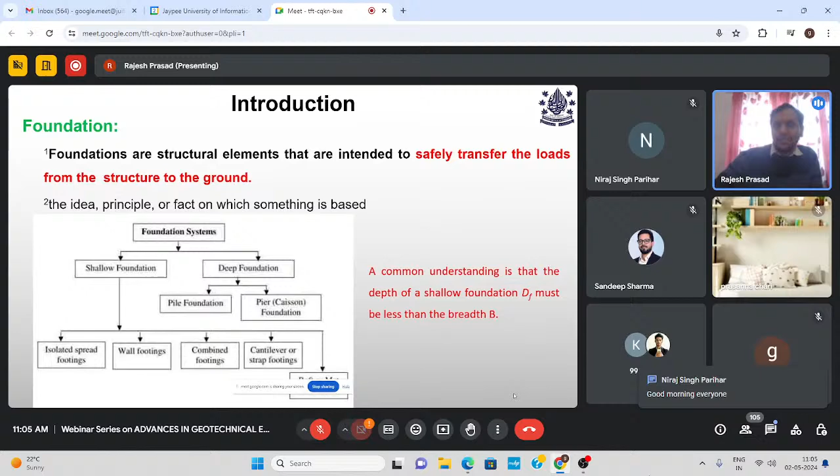So let us see—we already know what a foundation is. Basically, foundations are designed to safely transfer the load of the superstructure to the ground, and foundations can be classified into shallow and deep foundation. It is generally understood that if the depth of foundation is less than the breadth of footing, we can say it's a shallow foundation, and if the depth is more than the breadth, it's a deep foundation. But this is common understanding, not the real definition—just the initial thought process when dividing foundations based on whether they are deep or shallow.

So what is the purpose? As I see, it is basically to transfer the load safely to the ground. First, without failure of the soil, without compromising the safety of soil or without the shear failure. Then the settlement of the foundations should not exceed the permissible settlements, and there should not be excessive settlement. So the second criteria, that is the settlement, is just called the serviceability criteria. And the first criteria is called the bearing capacity criteria, where we don't allow soil to fail in shear.

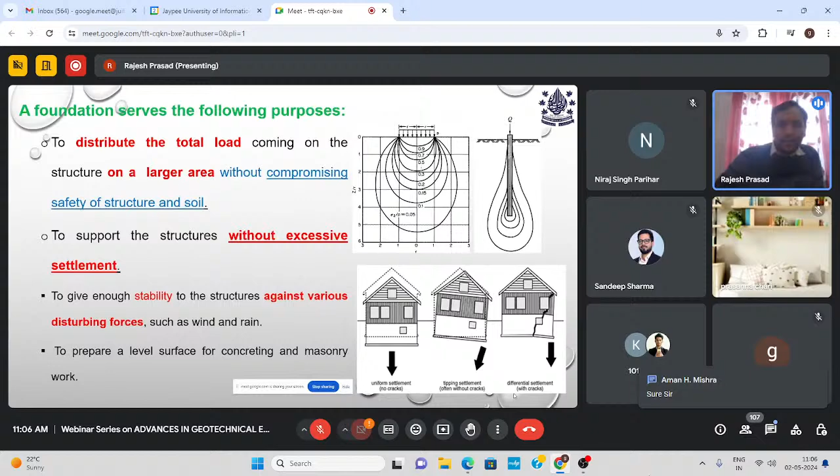Sometimes the settlement also poses problems under sloping conditions. Suppose if the ground is sloping or earthquake loadings are there. So it is very common, even in normal conditions, to have either tilt or differential settlement. It is very difficult to have uniform settlement. So this is the disadvantage of slopes or seismic loading conditions.

So sometimes what happens is we design our superstructure very strong, and foundations also very strong, but the problem might be the soil failing. So even after designing a very good, very strong foundation and a strong superstructure, they are really failing.

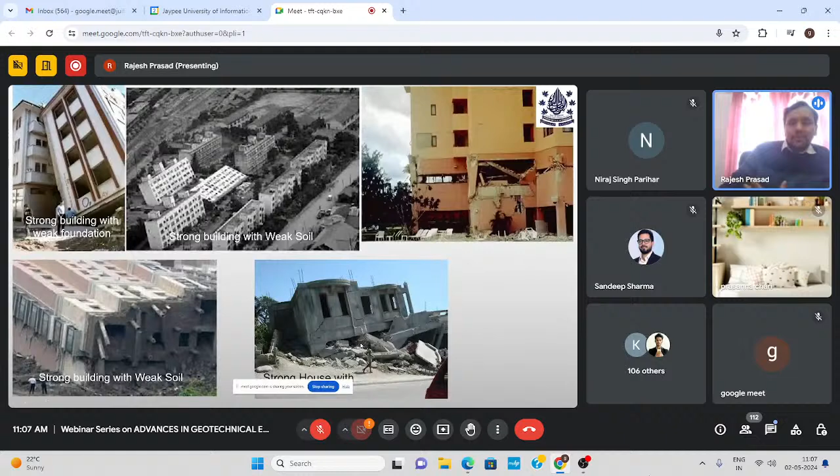Here we can see the superstructure itself is very strong. Here pile foundations are tilted a little bit, you can see, but almost all our piles are intact. So we can say here we have strong buildings with strong foundations but bad soil. Here we can see the building is almost intact, because the foundation was big. So these are the conditions we have to take care of in real scenarios.

So as we discuss deep and shallow foundations, the real criteria is the failure criteria. We can classify any foundation, whether it is deep or shallow, just based on their failure criteria, not generally based on the depth of the foundation.

So if we see in shallow foundations, generally we can see punching, or mostly we can see general shear failure. Generally what happens when we apply loading on the foundation is first there will be a little bit of elastic deformation. If we remove the load, it again regains its original position or shape. After the elastic deformation, we have local cracking from the sides, because this footing is almost, you can say, a rectangular footing or strip footing.

So there will be concentration of stresses at the corners. When there is concentration of stresses at the corners, we have local cracking around the footing or around the corners. Then we have wedge formation, and finally development of the rupture. So this is the development of the failure modes, how it has developed.

And similarly, if we see in the load settlement curve, the same things will be reflected here also. The initial portion is a straight line, stress is proportional to strain, almost - I can say this is the elastic region. Then we have the transition state, where the plastic zone is developing, and then again we get a linear portion, where again the slope is constant. So this is again the plastic region. This is generally the type of failure we see in this case.

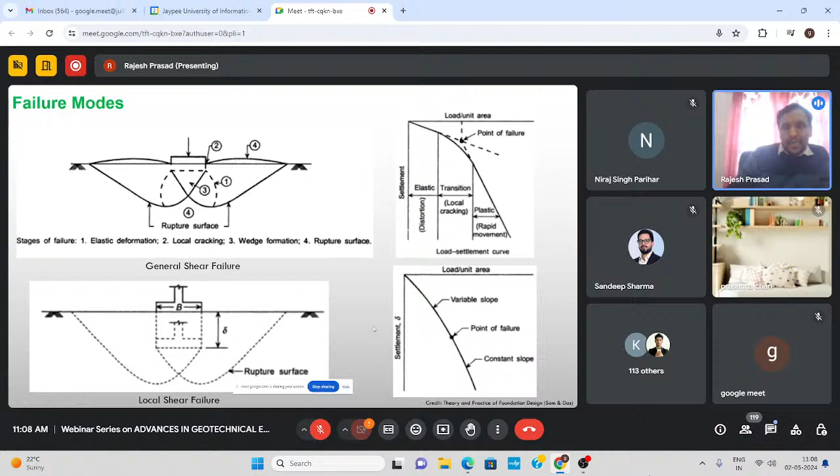If your soil is strong, we can see general shear failure in the shallow foundation. Sometimes our soils are not very good, then we can have local shearing also. So now, if foundations are very deep, we look at this df by b prime plot versus relative density. We can see here if density is high, generally our depth is less, the d by b ratio is less than 3, and we see general shear failure.

Similarly, when relative density reduces, and for the same depth or little more depth, we have local shear failure here. But for punching, when the d by b ratio - where b prime is nothing but 2bl divided by b plus l - gets more than about 5 or 6, we generally see punching shear failure. Then the behavior of the foundation becomes independent of the relative density.

What we can see here is that the failure pattern is independent of the relative density of the material. It is always going to be the punching shear failure.

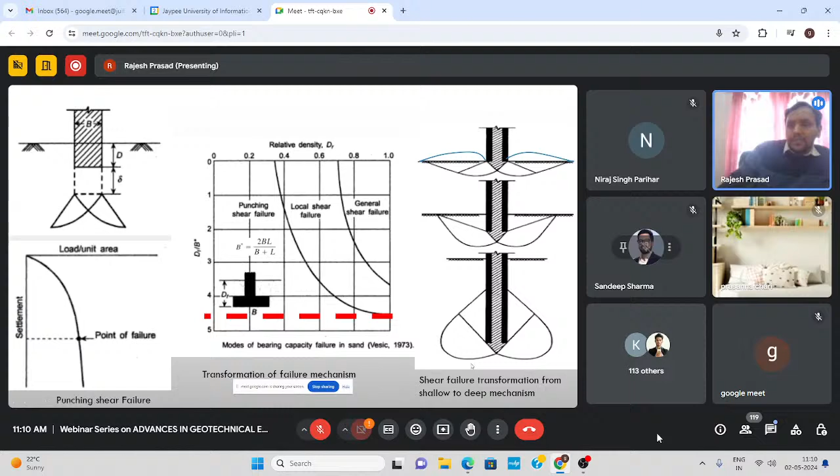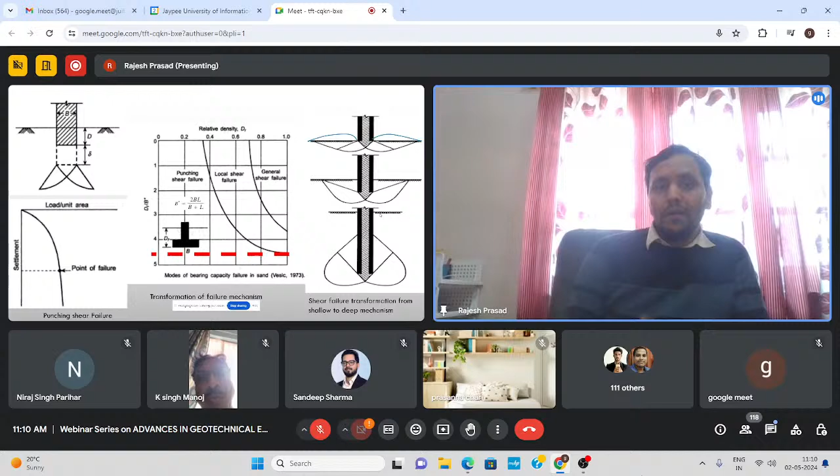So this is the transformation of the failure mechanism as we go from shallow to deep. When it is a shallow foundation, we see general or local shear failure. When the D by B ratio is more than 5 or 6, we see either punching or very confined failure. At the intermediate level, we have confined failure also, when the failure surface doesn't reach the ground surface. So on this basis, we have to classify the foundation as shallow or deep, not based on the D by B ratio.

Now, as the topic of the presentation is foundation on slopes. When we ask students this question, even after BTech, even after MTech, or when they are appearing for their PhD interview, some students have worked on foundations in their master thesis.

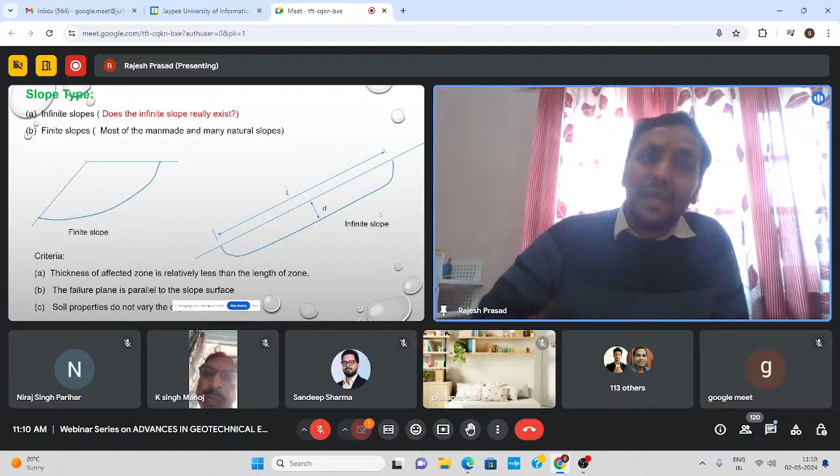When you ask what is the difference between infinite slope and finite slope, they hardly able to answer this question. Generally we think that infinite slope is any slope that has infinite length, infinite extent. But if something is infinite, we never see any slope that is truly infinite. They don't exist, at least not on earth. Similarly, finite slope - most of the time we see man-made slopes like embankments or dams, or many natural slopes are also finite slopes. So how can we classify slopes as infinite or finite?

Most students don't know what an infinite slope is, even after getting their degrees. So what are the different criteria to define a slope as infinite? First, the thickness of the affected zone is relatively less than the length of the zone. If we say this is the affected area where landslide occurs, there is a chance of a failure surface developing there. If we zoom out on the failure surface, we see the length of the affected zone and the depth of the affected zone. If this D by L ratio is less than 0.1, then we can say this is an infinite slope. This is one criteria.

The second criteria is that the failure plane is always going to be parallel to the slope. In case of an infinite slope, generally they have the failure surface parallel to the slope surface. So this failure surface is almost parallel to the slope surface - this is the second criteria.

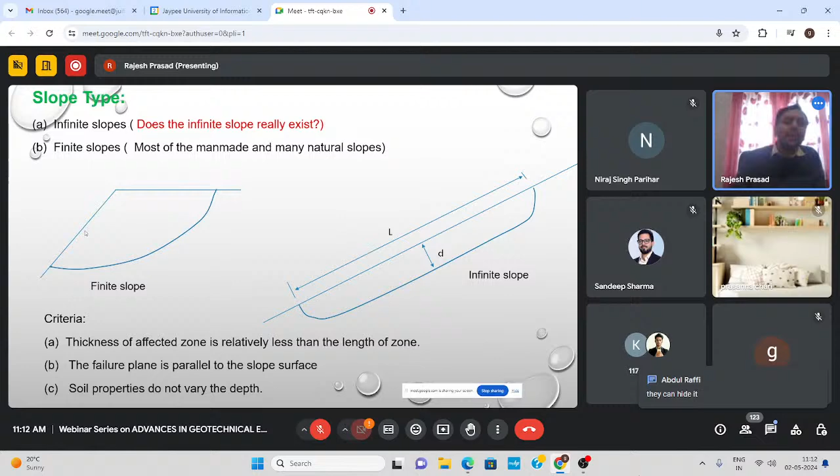The third criteria is that soil property doesn't vary with depth. So up to a certain depth, this soil property remains the same here, here, and here. Another issue is that the variation of vertical stresses should not vary with depth generally. So these are the criteria needed to be satisfied for an infinite slope. If these criteria are not satisfied, then the slope is a finite slope, and here the soil properties might be varying with depth also. So this is the basic difference between finite slope and infinite slope.

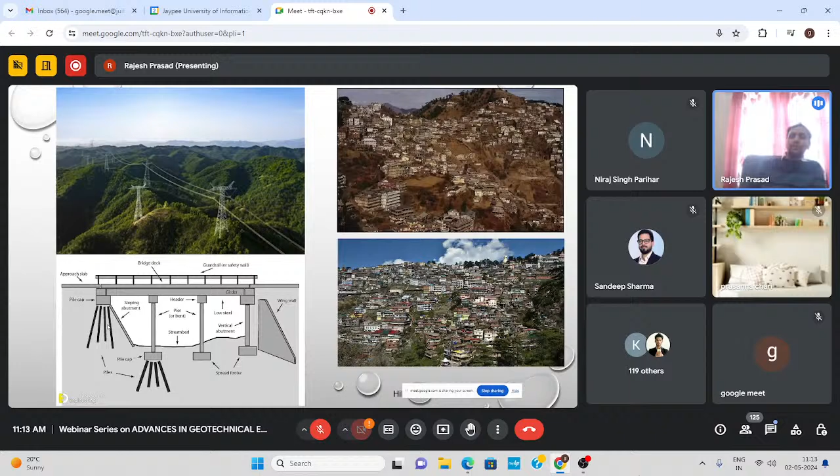So therefore we need to design, or we need to determine the bearing capacity of foundation on the slopes.

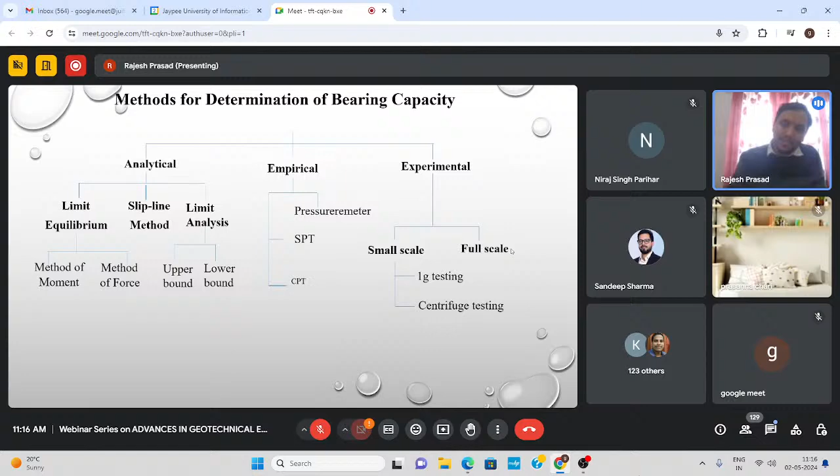Small scale can be classified into 1G testing or centrifuge testing, or full scale. Generally, we never perform full scale testing. What is the reason? We don't have that much fund or money to do the number of experiments at full scale.

There's also the slope stability problem. In case of level ground, we don't have to worry about the stability of slopes since there is no slope. But in case of slopes, first we have to make sure that the slope itself is stable. After that only we can start the construction. If the slope is not stable, then we have to go for ground improvement techniques and then construct the foundation. So this is another issue we face in case of slopes.

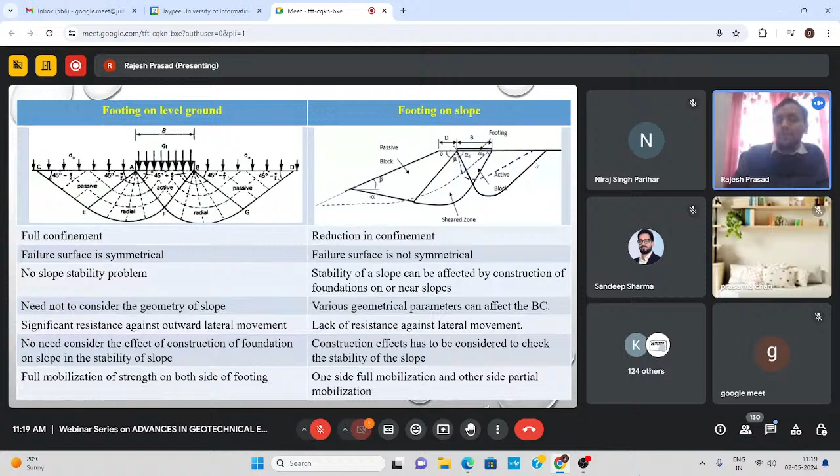And what is the other issue? The sloping side of the soil fails before the failure of the level side ground, so there is no full mobilization of the shear strength of the soil. In the sloping region, there is only partial mobilization of the shear strength, whereas on the level side, there is complete mobilization of the shear strength of the soil. So this is the problem here, and these things make the problem very complicated.

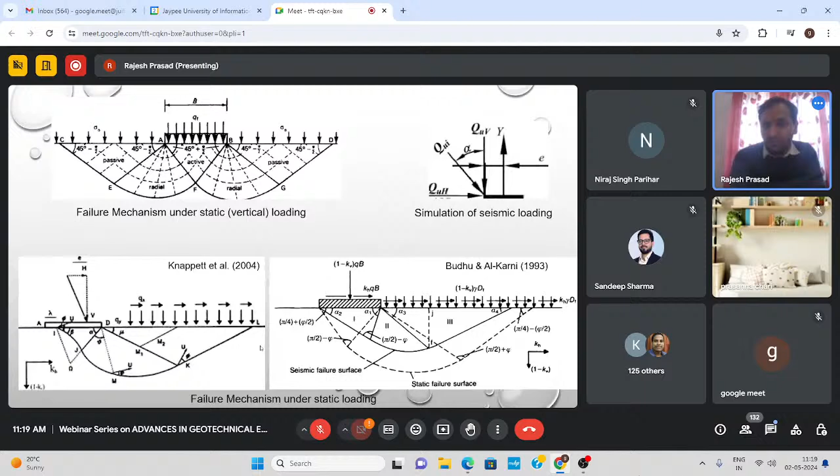If there is also an earthquake on the slope, the earthquake loading will further reduce the factor of safety of the slopes, or the load carrying capacity of the soils. So in general, if you want to simulate seismic loading but don't know the seismic load, you can simulate it using eccentric inclined loading instead. It has almost the same effect, so we can simulate that way.

Now, if we talk about codal considerations, our Indian Standard IS 1904, 1986, has some guidelines, but they are very broad and don't help much. These guidelines are common and don't depend on soil properties, foundation size, or slope size, even though many such parameters exist. What they do say is that the distance between the slope and the outer edge of the foundation should be more than 900 mm minimum. Another requirement is that, since we never construct a single foundation, the line joining the outer edges of two foundations should not be steeper than one vertical to two horizontal.

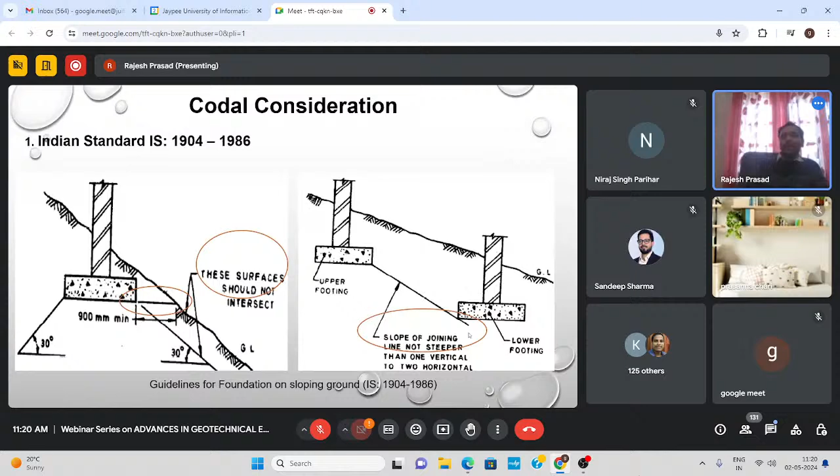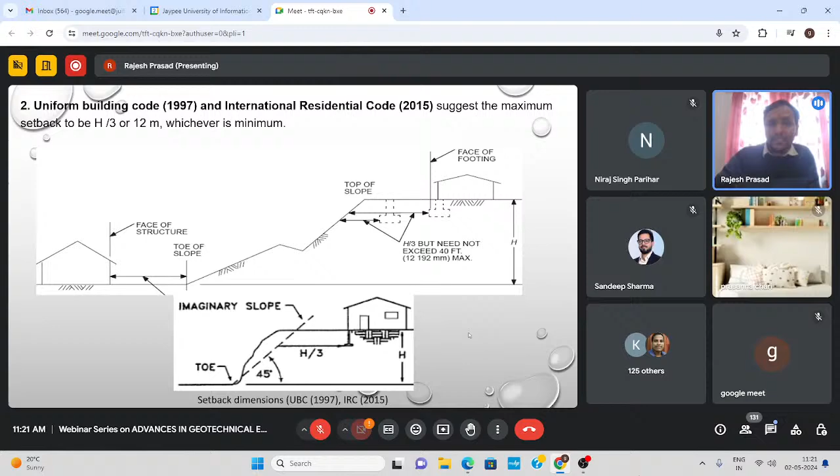So we can see these guidelines are not enough to make any construction on the slope. Similarly, the Uniform Building Code or the International Residential Code also only give very common guidelines, not specific ones. They don't consider the slope effect much, nor the type of building or type of slope. So this is the problem with almost all of them.

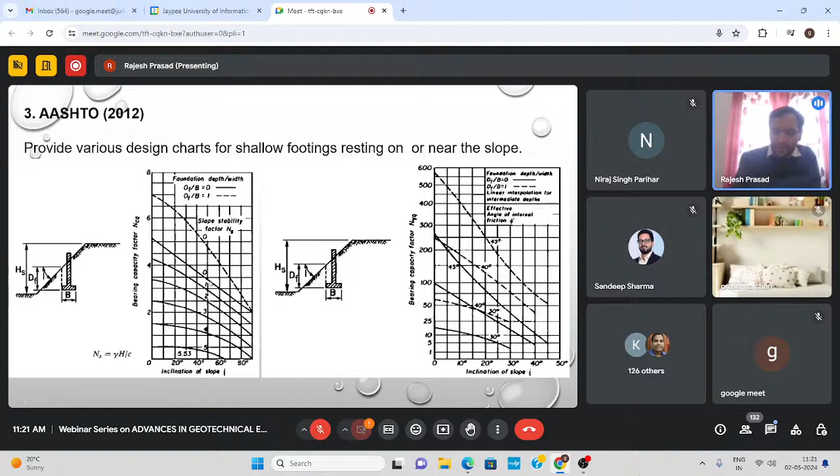Then we have AASHTO 2012, whose graphs are taken directly from the Meyerhof study. Meyerhof first tried to determine the bearing capacity of foundations on slopes, and these charts have been directly taken from that work.

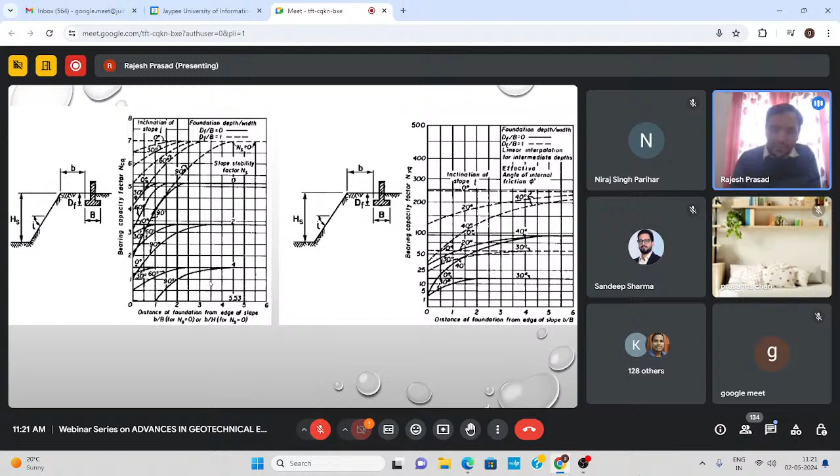So now coming to my problem: the first problem is foundation on the slopes, which we analyze using FEM. The first case is strip footing resting on the slope, the second is isolated footing resting on the slope, then multiple footings—two footings resting on the slope—to find the interaction effect, then skirted foundation on the slope, and then bucket foundation on the slope. So we have tried to find out the effect of different types of foundations on the slopes.

For the bucket foundation, we cannot use the plane strain condition, so we have used 3D modeling there. We were able to define the problem as plane strain in the case of the strip footing and the skirted strip footing, so we used plane strain conditions with 2D modeling. For the isolated foundation and the bucket foundation, 3D modeling has been used.

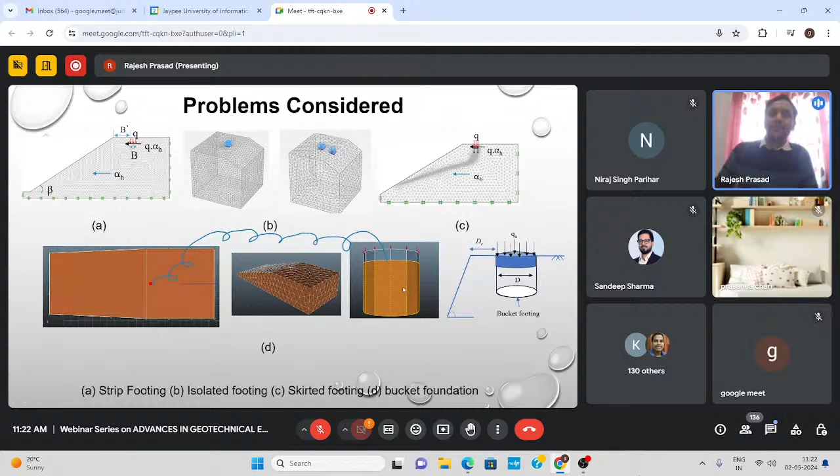I'm not going into the detail of the numerical modeling so much. Before starting any numerical modeling, we have to find out how many elements are required to perform the analysis. So we increase the number of elements one by one, whatever is possible, whether using Plaxis, GeoStudio, or Optum. First try to find out the optimum number of elements to perform the analysis. In this case, we increased it and found that when the number of elements is more than 5 or 10, the results become constant. So here we can see 15 elements are more than enough.

Then the number of iterations. Nowadays it is very common practice in the softwares. What do softwares do? We have so many elements in what you can say we are designing, simulating the soil element.

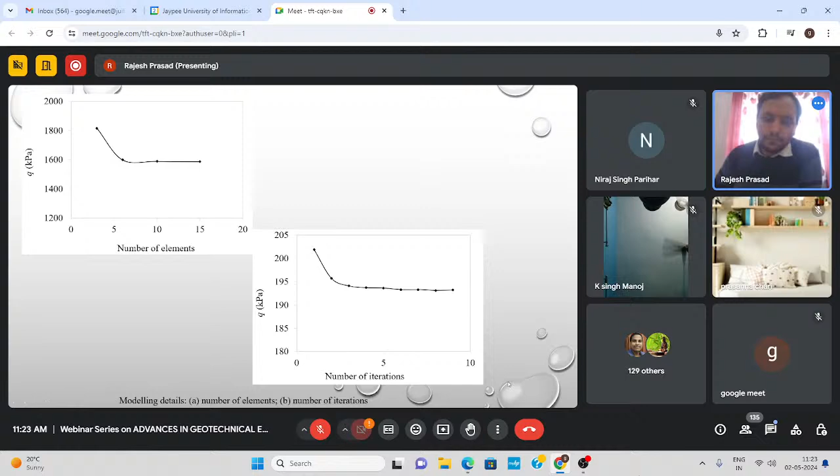Now, if you are doing any numerical analysis, all numerical analyses are just like a black box. If you don't understand what is going on inside, it is very problematic. We have to understand what is happening inside, or after the analysis, we have to compare our results with earlier studies, to see whether we are getting almost identical results or not. Because in software, if you give any input, they are going to give you some values, but they might be right or they might be wrong. So we have to make sure our model is validated.

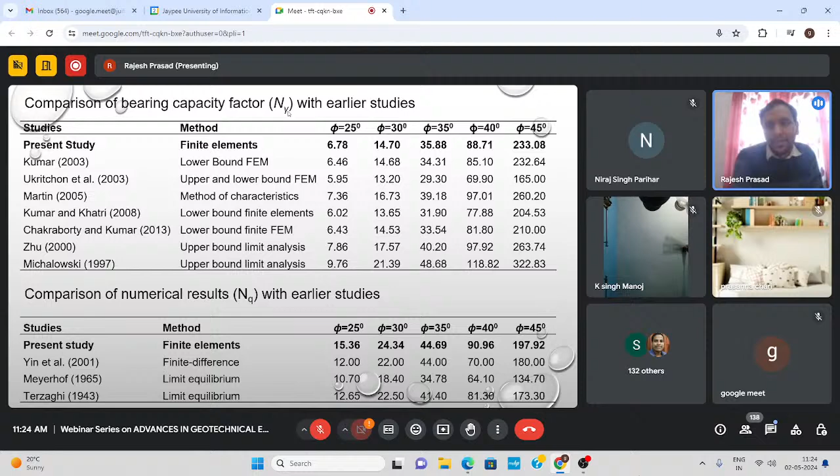Then we determined NQ, the bearing capacity factor because of the surcharge, and this is the bearing capacity factor considering the weight of the soil. We compared these and found they are within the range of earlier studies. So we can rely that whatever model we have developed is giving almost accurate results, or results within acceptable consideration.

Further, these are comparisons of our results with earlier results. We can see here they give good results. This black color is the present study, as you can see. This is for N gamma, then N gamma Q. Terzaghi gave NC, NQ, and N gamma as three separate bearing capacity factors.

But what does this mean? Terzaghi first considered soil to be weightless in one condition, another condition without surcharge loading, and another condition considering only cohesion C. So here this is a bearing capacity factor which combinedly considers the effect of gamma as well as the surcharge. This is one new bearing capacity factor.

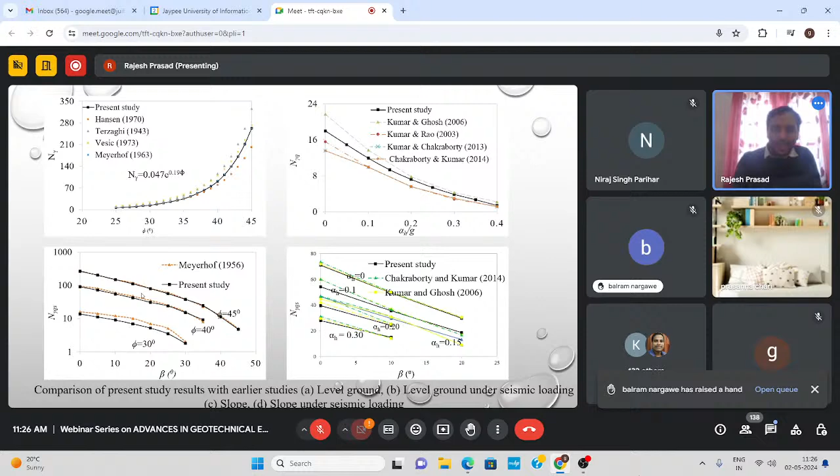Similarly, this is the bearing capacity factor under the seismic loading condition. Our model results have been compared for slopes under static condition, foundation on level ground, strip footing on level ground, isolated square footing on level ground, then on slopes, then under seismic loading condition. After all this comparison, we can say that the model is giving perfect results.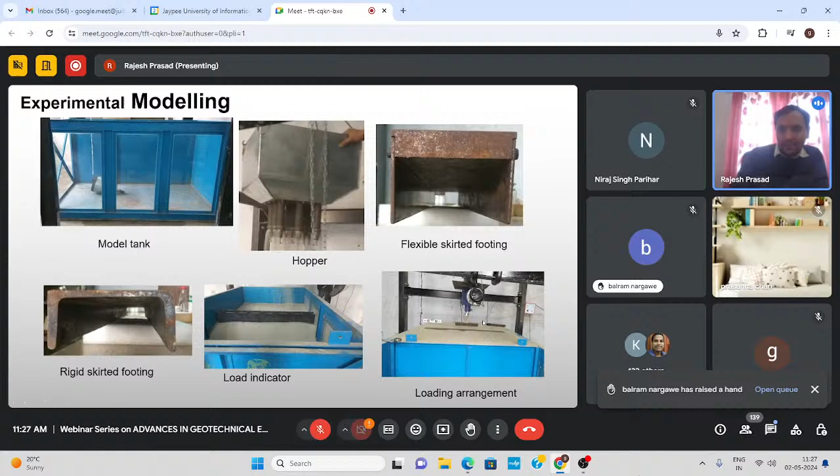And this is the flexible skirt. We can see these are small strips of cast iron, and you can see they may bend also, so we have defined them as flexible skirted foundation. Then this is the rigid foundation—these are very thick and not going to bend, they will not be subjected to any deformation. So this is the rigid foundation. Then this is the foundation, and then we filled up the sand here. So how did we start on the slopes?

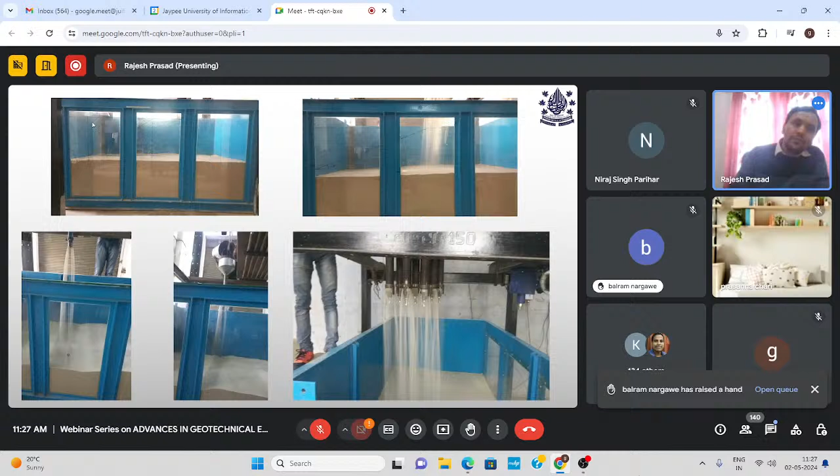Then we have tried to make the slope geometry, because we have to analyze the foundation under different sloping conditions. So with the marker pen, we try to mark the slopes here.

Then after filling it, we used to fill one by one slowly, and we can see here clearly how the slope has been formed. Perfectly we have been able to make the slopes in the lab itself, exactly whatever we have drawn here.

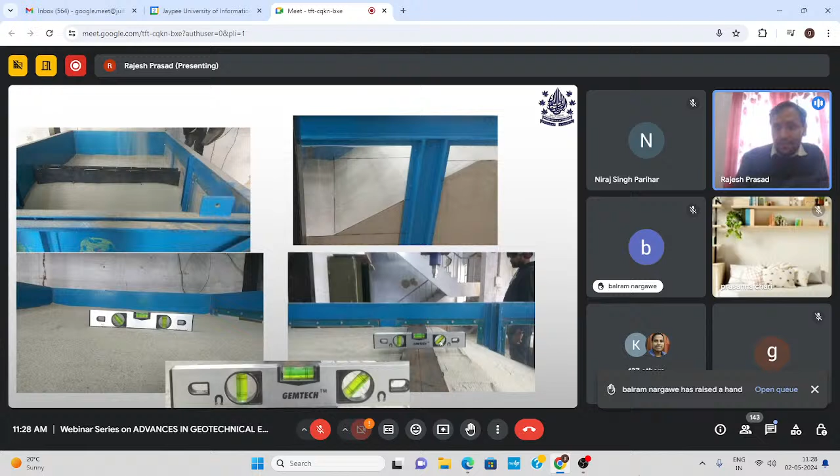After making those slopes, we have to see whether that ground is level or not - it is up to you what you want to check. Then after placing the foundation, initially the foundation should be level. So we have checked with the level whether the foundation is already tilted before the testing or there is no tilting there. We have to make sure of all those things in the experimental testing.

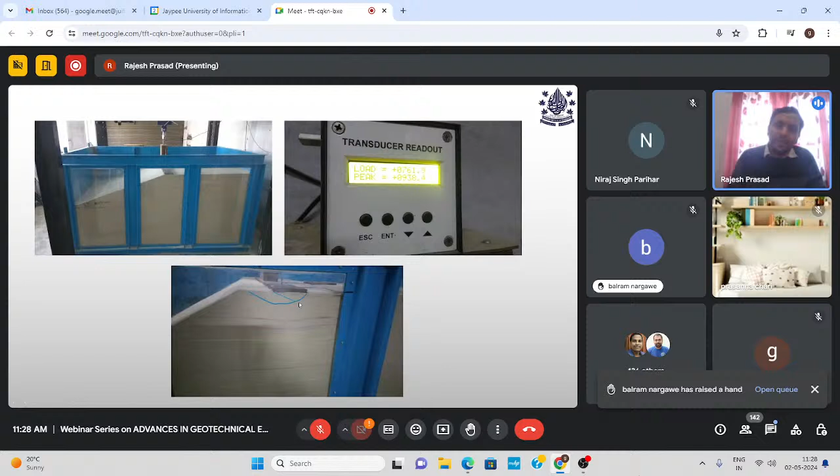Then we have to apply the loading. After the application of loading, we can observe how the failure surface is developing. We can see here below there is no change in the layers - they are almost intact. But up to a certain depth we can see there is compression there. Here the failure surface, that is a very shallow failure surface we can see here. So this is the experimental study that has been performed.

So now first I will discuss the strip footing on the slopes using constitutive modeling. I will consider only this case in today's presentation. So what is constitutive modeling? Constitutive modeling basically deals with the stress and strain relationship of any material.

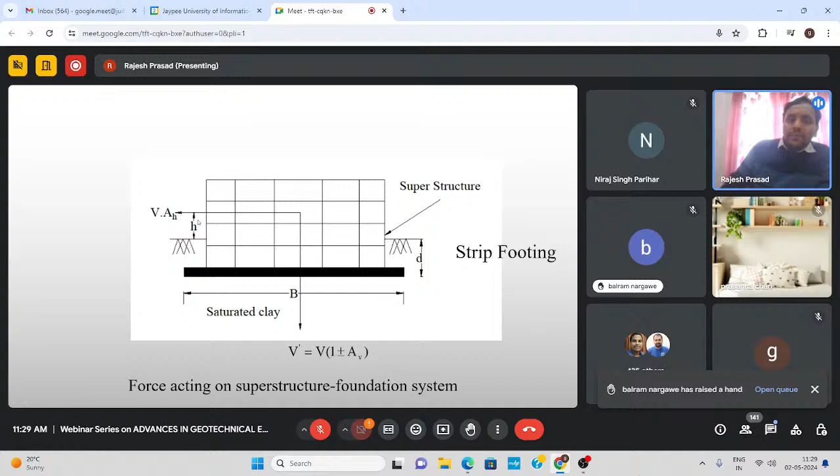So most of the previous studies have neglected the effect of this height - basically the moment at the base of the footing. So in this study, the moment has also been considered. This is one advantage of this study. And these are the cases you can see here: moment is also there, vertical loading is there, horizontal loading is also there.

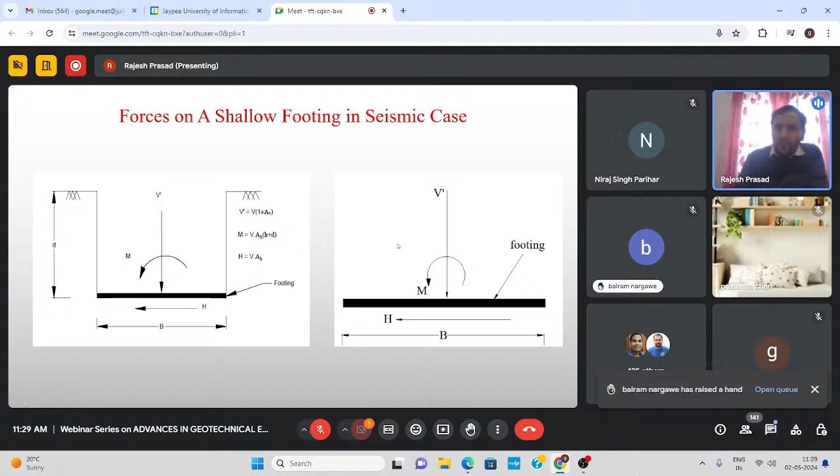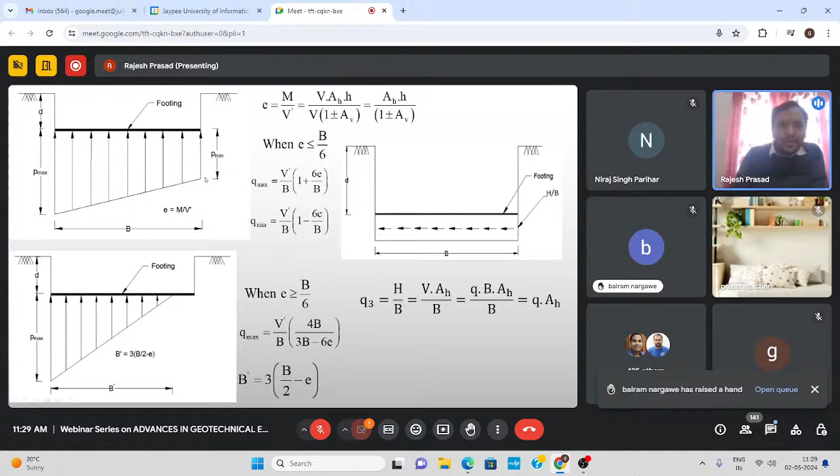So when moment is there, we can see here what is the eccentricity, m by v prime, all those things. We know what is q max here, what is q minimum here - already we have studied this at the BTech level.

So we can get the average settlement. Average settlement equals S minimum plus S maximum divided by 2.

So for total settlement, if we want, we can integrate strain along the vertical line, and so we can get the total settlement here. So from this model, basically we can get these A and B parameters.

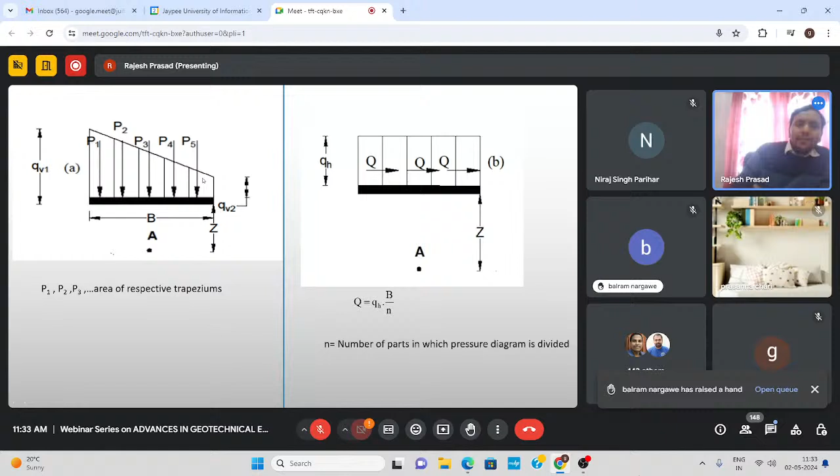So here we can draw something like a pressure diagram. We divide the whole pressure zone into different areas, determine each area, and get forces P1, P2, P3, P4, P5 - a number of forces. Because of these forces, we can determine the stresses at any point using the earlier given equations. Similarly, for horizontal loading, we have a number of horizontal loadings, and we can find the stress at any point A generated because of these Q loadings.

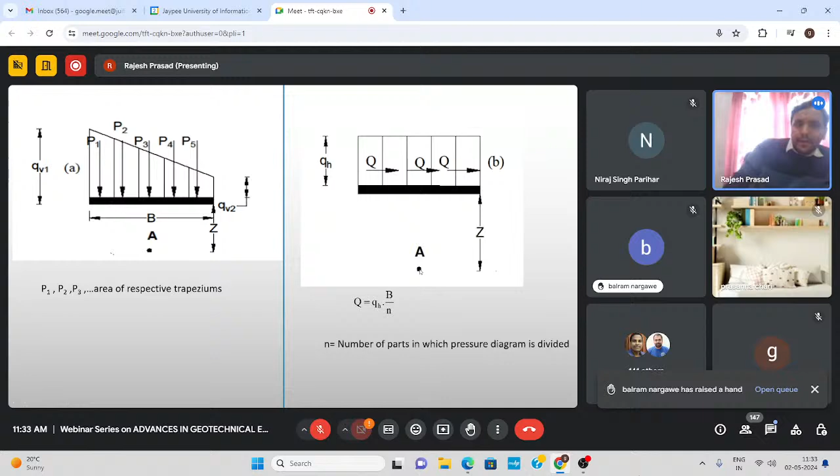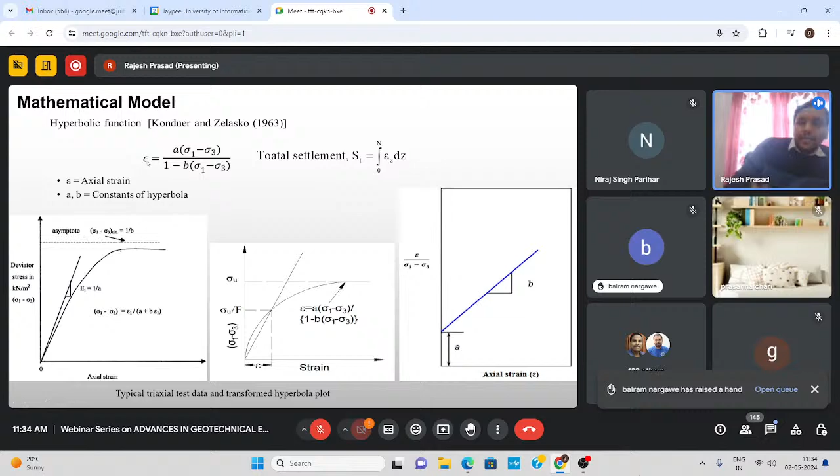So in this way, first we try to find the stress at any point. Now, if I have the stress, I can get the strain also using this hyperbolic function relationship. I already have stresses, sigma 1 and sigma 3, determined using those equations. Now I know the soil properties - A and B, which are functions of the soil. Now I can get the strain at any point.

So in this analysis, what are the basic assumptions? The soil is semi-infinite, isotropic, and the foundation is considered as a rigid strip footing. For the soil, in one case we have considered saturated soil, and in the other case we have considered dry soil also.

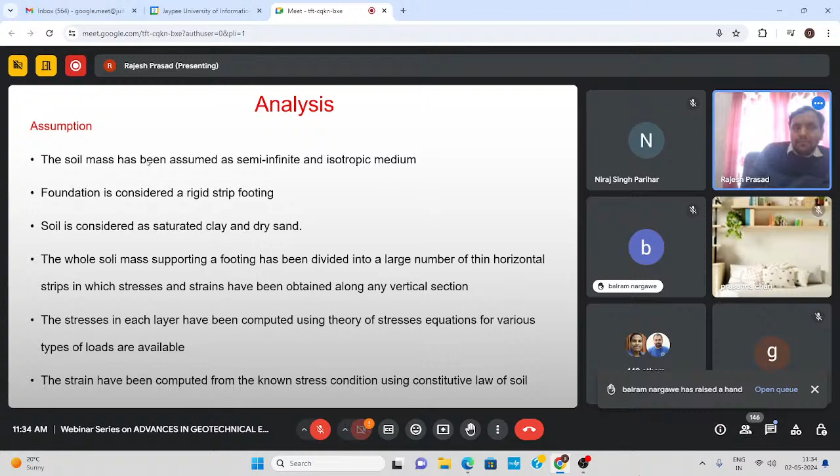The whole soil mass supporting the footing has been divided into a number of zones. So here's the footing. We mark different points below the footing - 1, 2, 3, 4, 5, 6, 7, 8. It depends on you - if the length or breadth of the footing is very high, you have to consider more points. Then we draw vertical lines along with that.

Then we determine the stresses because of superstructure loading at different points - what is the stress here, here, here. At all the points, 1, 2, 3, 4, 5, 6, we determine the vertical stresses. So at all the points, the first step is determining the stresses using the earlier given equations.

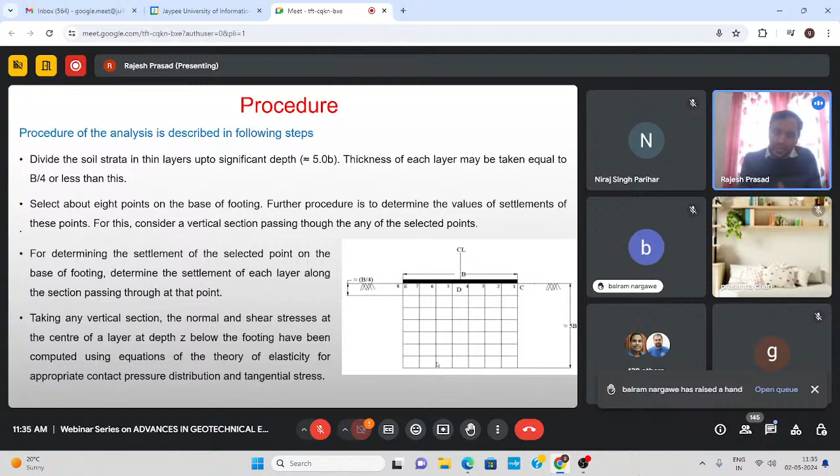Then we find the strains. Now I get the strain at this point, strain at this point, strain here, strain here. Now if I integrate the strain from this point to this point to this point, I can get the settlement. Similarly, we integrate the strains at other locations and get the settlement there too. So we already have the stress, we can get the strain, and then we can get the settlement also.

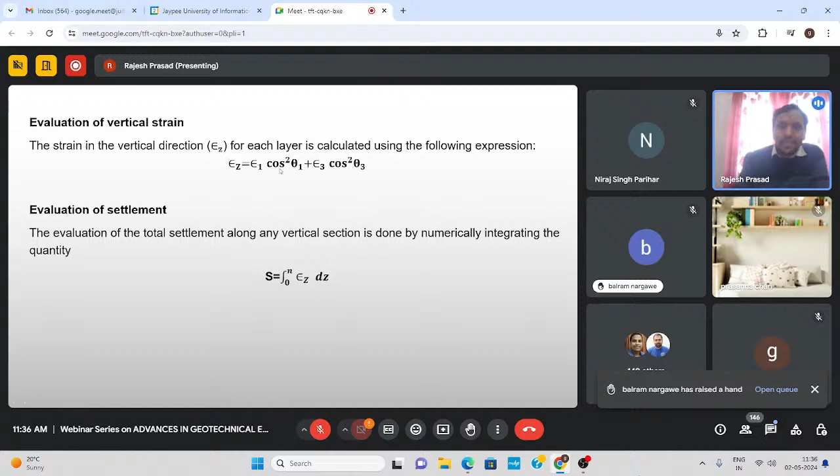So these are the equations to get the strains in different directions. If you want the vertical strain, it equals the total strain in the vertical direction, and this is the strain in the third direction. Theta is the angle between the principal stress and the reference axis. Then settlement equals the sum over number of layers from 0 to n, where we are just integrating that strain.

So let us see how we are getting the load settlement. We have kept different loading conditions, different surcharge, different loading of the superstructure. First case, we are increasing Q equal to 25 kPa, 50 kPa, 67.5 kPa, 75 kPa. So what we can see, when we are increasing the superstructure loading, settlement is also increasing. In case of 75 kPa, the maximum settlement at the center is almost 30 mm. So this is the settlement profile.

So this is the advantage of constitutive modeling. We are getting the settlement also. Here we have plotted different settlements as well.

We can see here for d by b equal to 0, and breadth of foundation equal to 1 meter, then d/b equal to 0.5. So if you keep your foundation at larger depth, what is going to happen? The settlement has been reduced. Earlier the settlement was 30 mm. You can see the maximum settlement here for the same loading. When increasing the depth of foundation, you can see it reaches from almost 32 to 20. So settlement has been reduced with increase in the foundation depth.

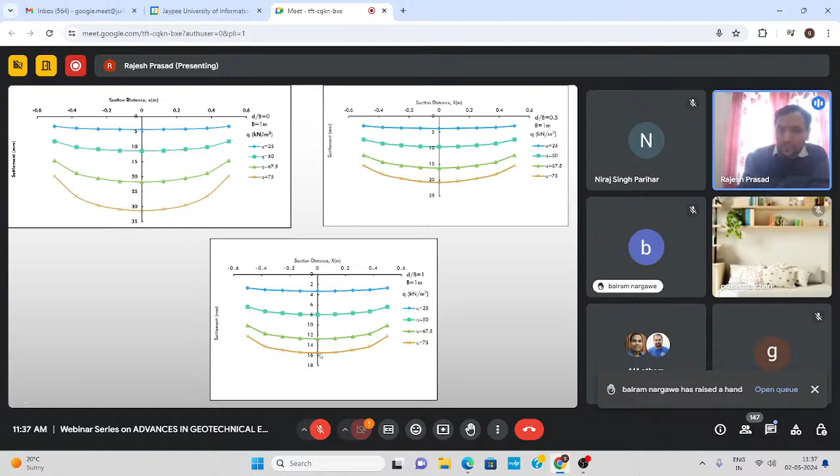We have further increased the depth of foundation, and it goes down to 16, as you can see. So with increase in the foundation depth, we are getting a smaller amount of settlement. This is the settlement profile below the footing.

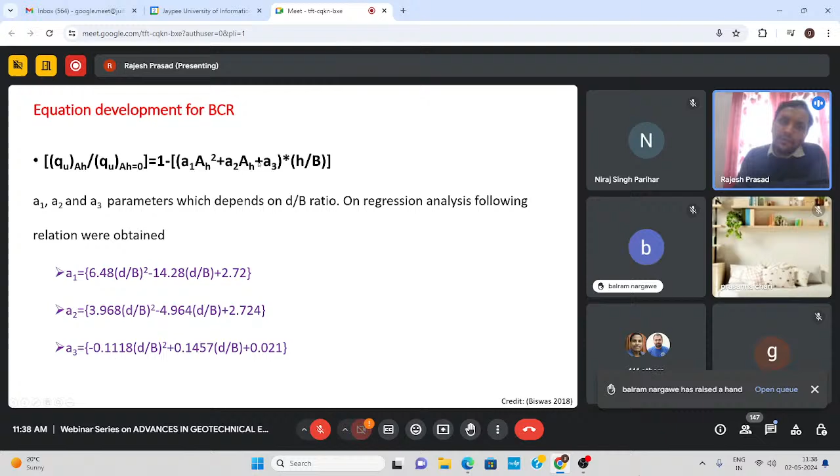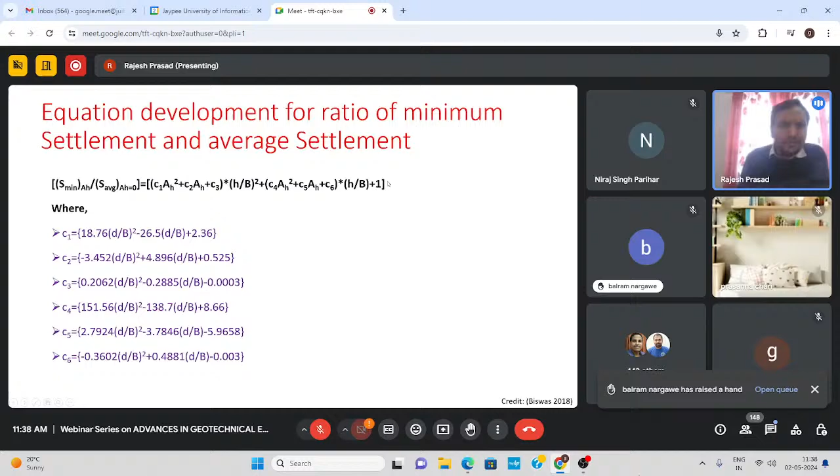Similarly, what is the S max under any seismic loading condition divided by the S average under static loading condition. If I know the S average under static loading, I can get the S max under seismic loading using these equations. So these are some equations. Then S minimum divided by S average, so we can find out the S maximum as well as S minimum under seismic loading conditions.

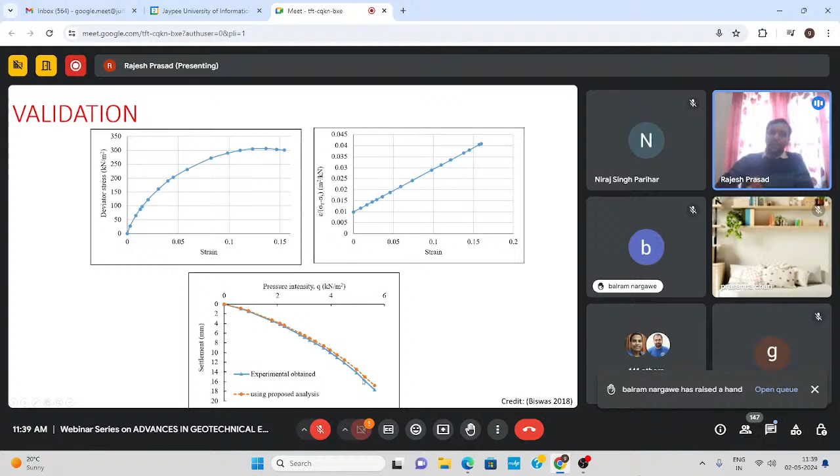So this is the validation. For a particular soil, the triaxial test has been performed, and after that it has been modified, and we got the 1/a and 1/b values. After getting this A value, this is the experimentally obtained footing result. If we do testing on the footing, we got this settlement profile, and using the present method, we got something similar. So using the proposed method, we have obtained the settlement profile.

Now let us solve a problem. Determine the amount of vertical load that a strip footing of breadth 1 meter resting on saturated clay can carry. This is the property of clay. You have to do the triaxial testing, from which I can get the 1/A value also.

This 1/A is indicating the stiffness of the soil, and this 1/b is considering the ultimate strength of the soil. So both have been considered; we are not just considering the stiffness or strength alone, we are considering both. The footing is located at a depth of 0.5 meter below the ground surface. Consider the factor of safety against shear failure to be 3, and the permissible settlement is 20 mm as per the code.

So what we have to do using these equations: d by b equal to... what is the depth given to us? Depth is given as 0.5 meter, and breadth of footing is 1. So I can say d/b ratio is going to be 0.5. So using this equation, QU at d/b 0.5 divided by QU at d/b 0.

So basically that's what we have to find out. First we plotted this plot for the footing resting on the ground surface. From here, what can we get? We can get that the ultimate capacity is 108.14 something. If you draw a tangent from here, I can get 108.14. So this ultimate bearing capacity we got from this load settlement plot for a particular soil with particular properties. Depth is 0, horizontal loading is also 0 here.

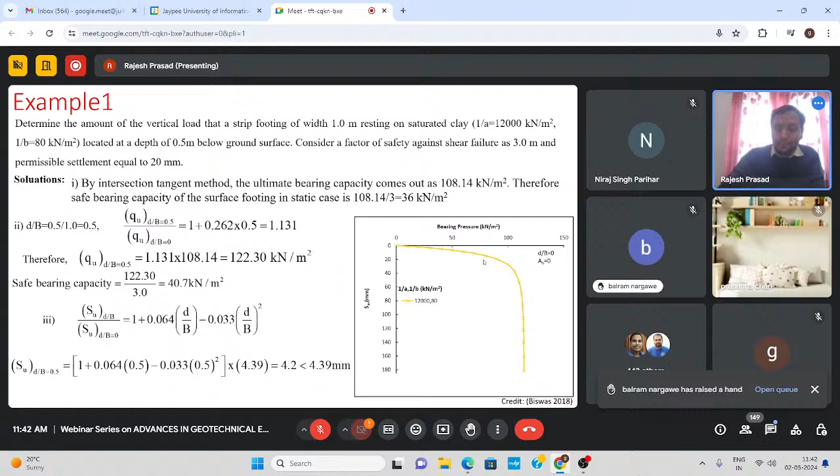Now suppose the same example is there, now it is subjected to a seismic coefficient of 0.1, horizontal seismic coefficient of 0.1. Consider the horizontal seismic force acting at a height of 2.5 meter from the base of the footing. So from earlier we have the solution, d/b ratio how much? 0.5. H/b equals horizontal force, where it is acting at 2.5 divided by 1, it means 2.5. So from the earlier numerical we got the ultimate bearing capacity when the horizontal force or seismic force was 0. How much bearing capacity? 108.14.

Now this is the equation that the present study proposed to determine bearing capacity under the seismic loading condition. So this is the ratio of bearing capacity under the seismic loading condition divided by the bearing capacity under the horizontal loading condition. So this equation has been proposed. So keeping the values of A1, A2, A3 and h/B, this comes to...

0.7565, if we keep all the values. So the ultimate bearing capacity under the seismic loading, or I can say alpha of 0.1, comes to... what you can say, 0.7565 multiplied by the bearing capacity in case of the horizontal loading condition. So it comes to 81.80.

From the load settlement curve, what did we do? We determined the bearing capacity for a footing resting under static loading condition, that also on the ground surface. Now we can find out even the seismic bearing capacity also. So therefore it will be noted that the safe bearing capacity due to seismicity decreases from 40.7 to 27.27. So we can see here, because of the earthquake loading, the bearing capacity has been reduced significantly. So this is the constitutive modeling.

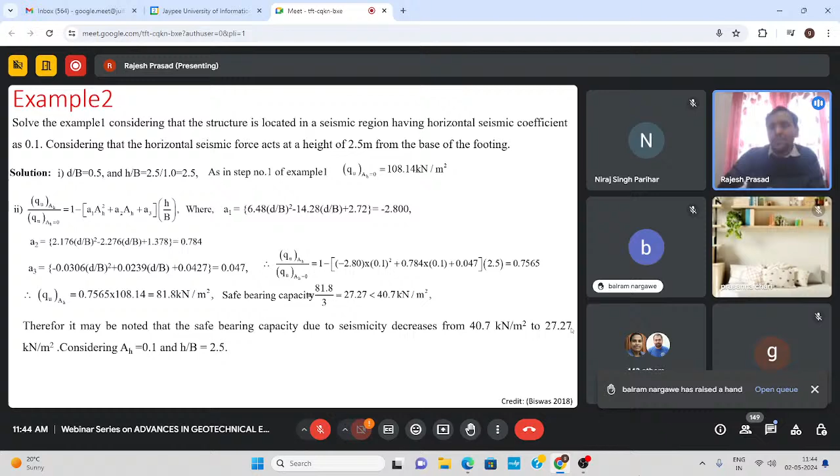Let me see how much time I have further. So almost now we can see we can get the S max under the seismic loading condition divided by the S average under the horizontal loading condition, or when there is no seismic loading. So this is the ratio. We are going to keep the value of this constant, along with the seismic coefficient and the h/B ratio.

We can get the settlements also. So we can see a settlement is increased because of the seismic loading also. So these are some of the examples.

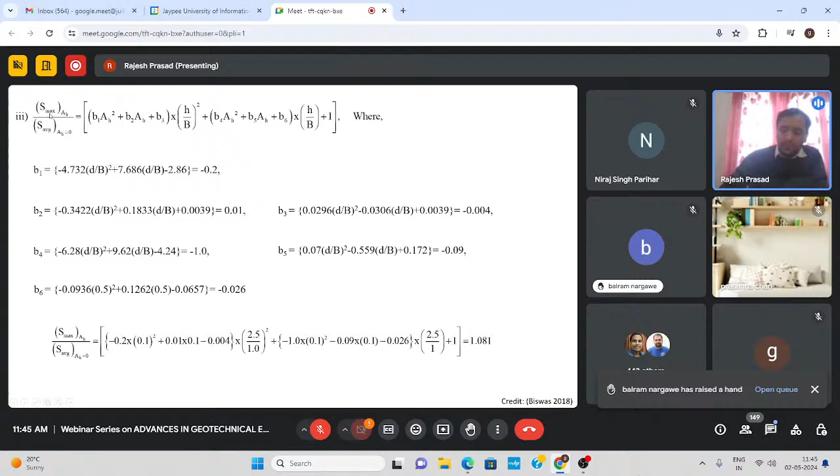Then we can find out not only the S maximum, we can find out the S minimum also during the earthquake loading condition if I have the S average under the static loading condition. So these are some important considerations or applications of the constitutive modeling. We can determine the tilt also, because if I know the S maximum and the S minimum, I can find out the tilt also. So this is the advantage of this constitutive modeling. We are getting the tilt also, we are getting the S max also, we are getting the S minimum also for seismic loading condition or maybe the static condition.

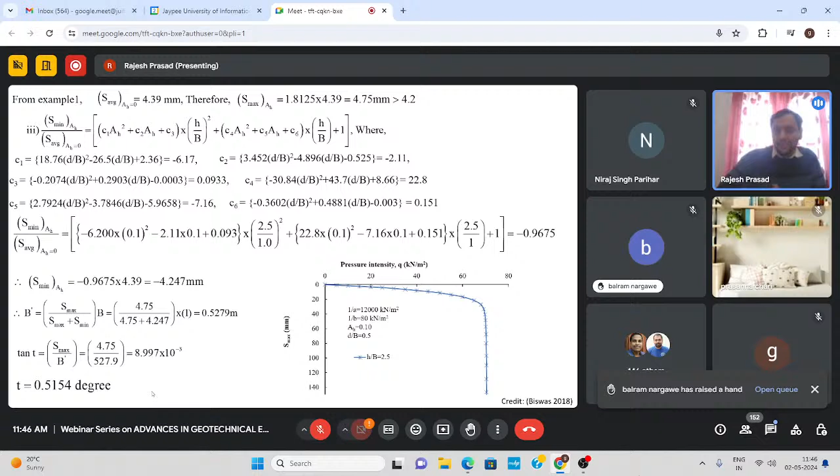So we don't need any software. See, these are very complex problems. If you know the constitutive modeling, we can use different models, not only this model. So students can use any models given by the researchers, and they can develop their own equations or bearing capacity equations also.

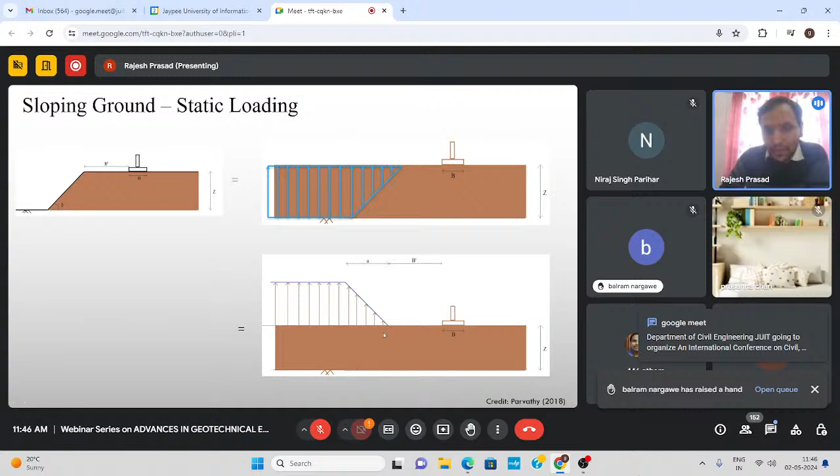So if suppose in case of sloping ground, suppose our ground is very sloping. So what we can do, you can see here there is nothing there. So what we consider, this soil is already there. So we consider some upward loading here to compensate this downward loading. So this upward loading is going to compensate the soil below. So it is going to give the effect of the sloping condition.

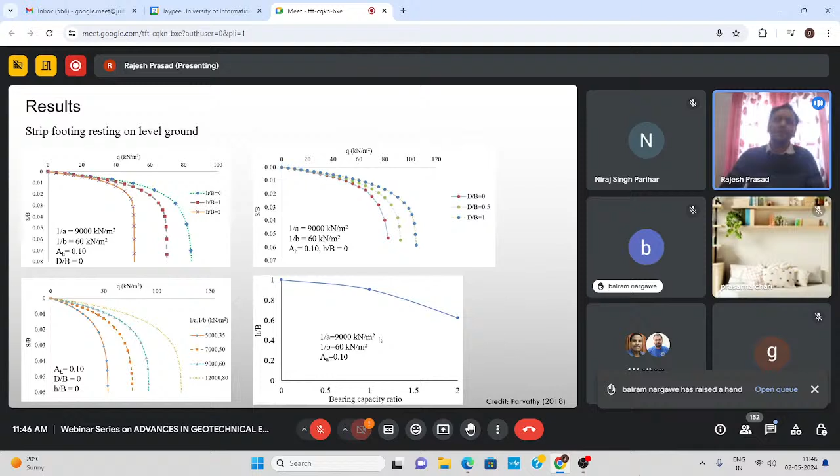We can see here something like that. So this soil has downward stresses. So I'm applying some upward loading here. So because of this upward loading and this downward loading, the effect is going to be the same here. So here also the same analysis we have carried out for the strip footing resting on the level ground. Then we got the load settlement curve for

in the seismic loading conditions. So what we can see, even in the slopes also, with increase in the density, we are getting more bearing capacity, and we are getting a clear failure surface also. You can say a clear bearing capacity can be determined here.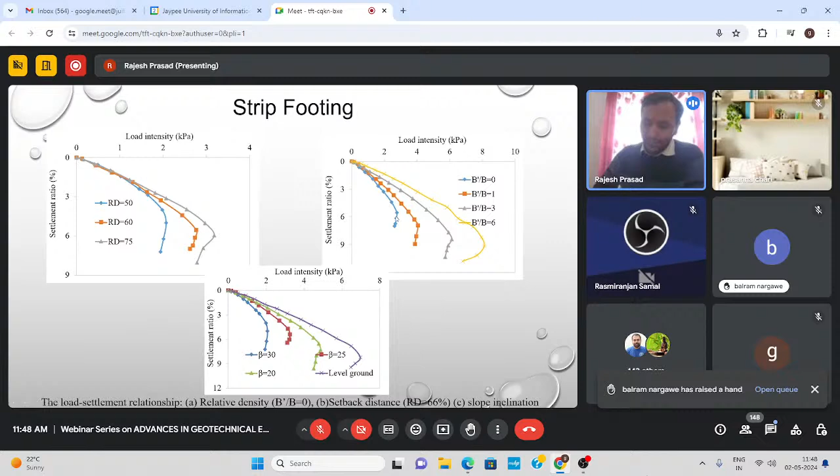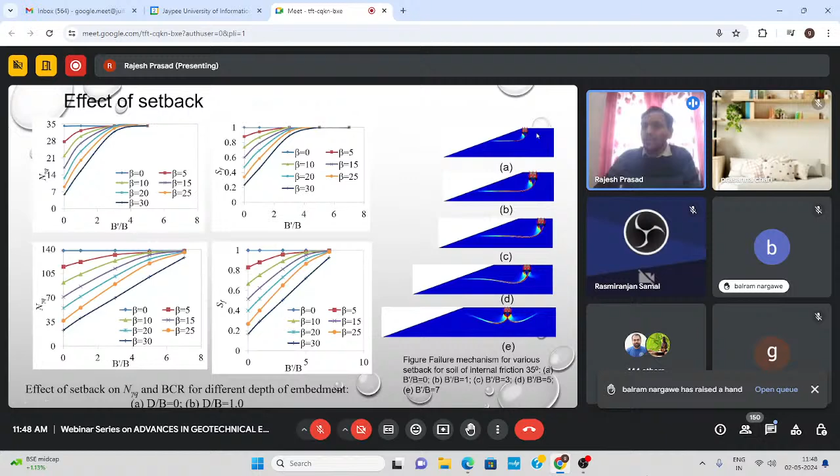So just I will go through this. So suppose what is the setback? Setback, you can see, foundation is resting very close to the slopes. So we can say this is the one side failure surface. Here also, when we are increasing the distance between the slope face and foundation, what we can see is the failure surface has become symmetrical. Now in this condition, the footing will behave like a footing resting on the level ground. So if we keep our foundation very away from the slope crest, I can get bearing capacity very much close to the level ground. So this is the effect of the setback distance.

Here you can see depth of the foundation when footing is resting at the ground surface. Very small area is there. You can see very small area contributes to the bearing capacity, or the failure zone is very small. So it is independent of the slope effect. If you increase the depth of foundation, the pressure bulb is going to enlarge, and it is going to be affected by the slope effect. So when we are increasing the depth of foundation, what is happening?

You can see with increase in the depth of foundation, bearing capacity is increasing. But what is the problem here? The effect of slope is also increasing. What is the reason? Because when the foundation is resting at a deeper depth, what is happening is the pressure bulb becomes very large. When the pressure bulb is large, it touches the sloping surface also. Here, the pressure bulb doesn't touch the sloping surface, so footing is independent of the slopes.

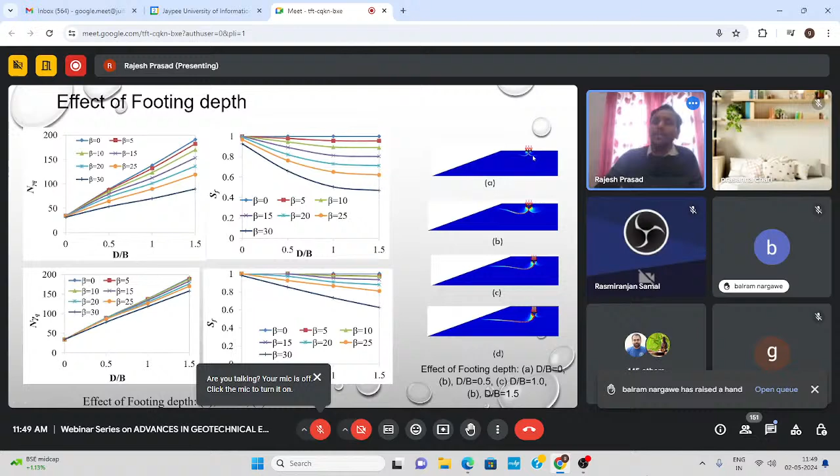You can see here slope inclination when footing is resting on the level ground, it is perfectly symmetrical ground surface. You can see the failure surface. When we are increasing the slope inclination, it is becoming one-sided. So here you can see the state is the bearing capacity failure. Up to a certain slope inclination, the failure is governed by the bearing capacity failure. But you can see here, it becomes a slope failure. So it is a mixed failure mechanism, slope as well as shear failure. At higher slope, it is going to become completely a slope failure.

That has not been considered in the present study.

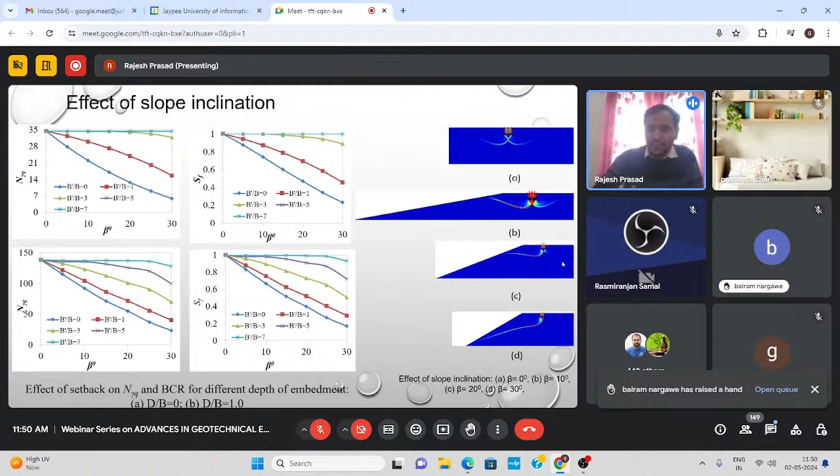Now, what is the effect of internal friction angle of soil? If phi is 0, the pressure bulb also goes to 0. We can see very small soil is going to contribute to the bearing capacity. When increasing phi, more pressure area increases, and it is affected by the slope effect. So when increasing the phi value, the bearing capacity increases, and the slope effect also increases.

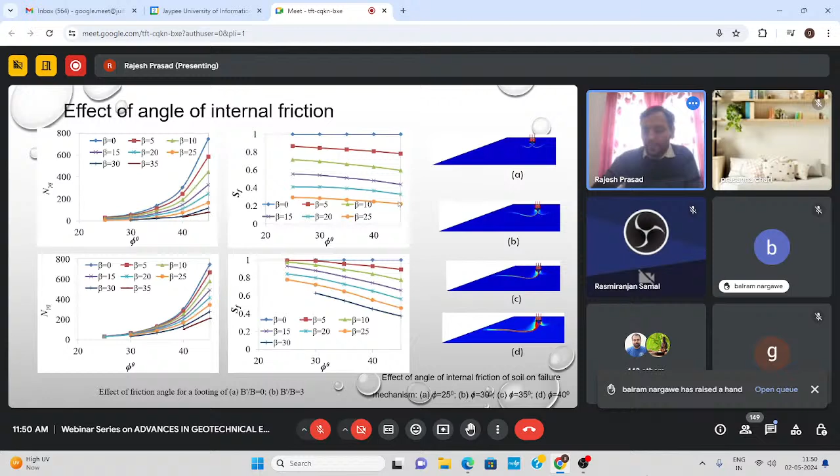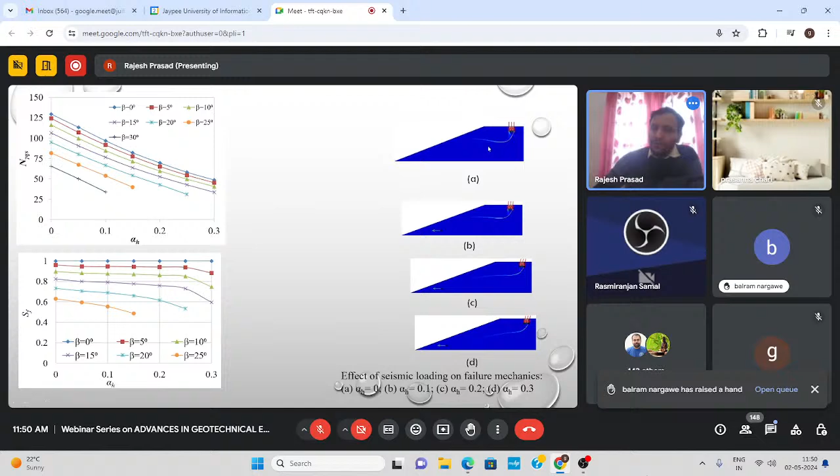Now, if seismic loading is there, it is bearing capacity failure. When we increase the seismic loading, it becomes slope failure. So this is the outcome of the study.

If you can see how much, what is the major important factor: we considered in one case cohesionless soil, in the other case cohesive soil. In case of cohesionless soil, angle of internal friction affects the bearing capacity very highly, 39% importance factor. Relative importance: then slope inclination 25%, seismic acceleration 18%, depth of foundation 10%, setback distance almost 8%. So phi and slope inclination are the two very important factors when designing foundations on slopes. Seismic acceleration is also important, but not as much compared to these.

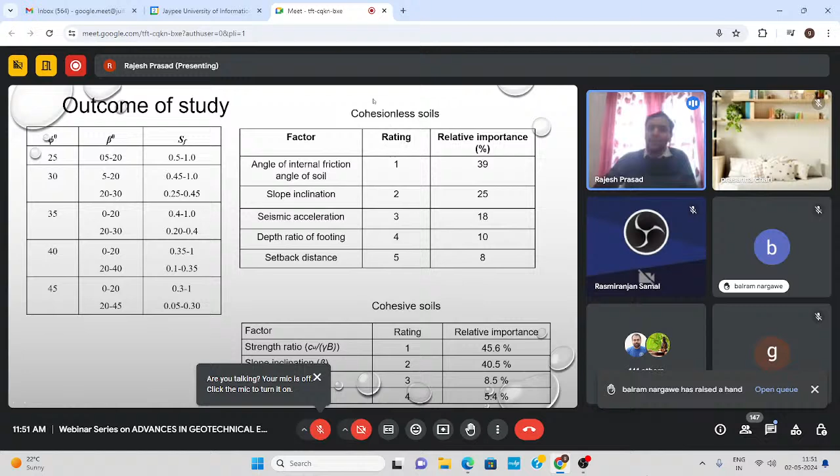In case of cohesive soil, again, strength is very important, then slope inclination, same trend. So we can say it is better not to construct buildings on slopes, but by improving the properties of the soil, we can construct on the slope also. If you increase the phi value or the C value, their effect is going to be more on the bearing capacity.

Then, how much distance do we have to maintain from the slope crest? You can see here, if this is the slope crest, it's 2 to 3 times the footing breadth. So we cannot keep the foundation near the slope; we have to keep it away. If your soil is very strong, more load carrying capacity means more area is involved, so we have to keep the foundation further away from the slope crest.

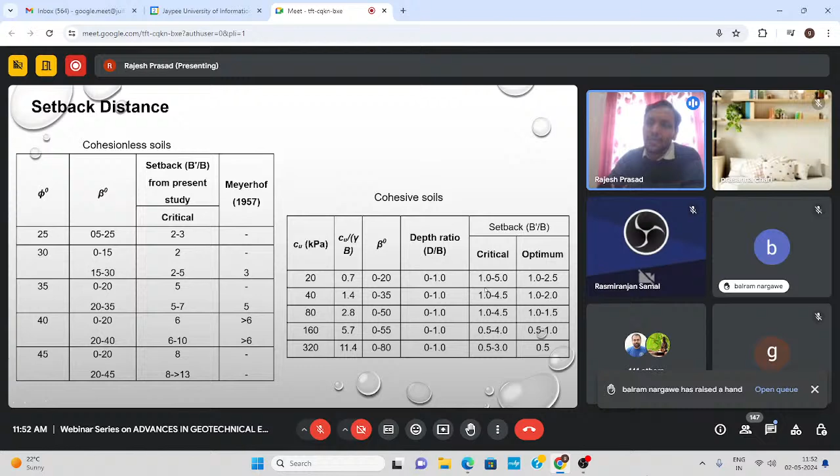So this is something here. Similarly, critical distance for the cohesive soil was also determined, and then these equations have been proposed. This is the slope factor, this is the bearing capacity factor. So these are the equations for critical setback distance.

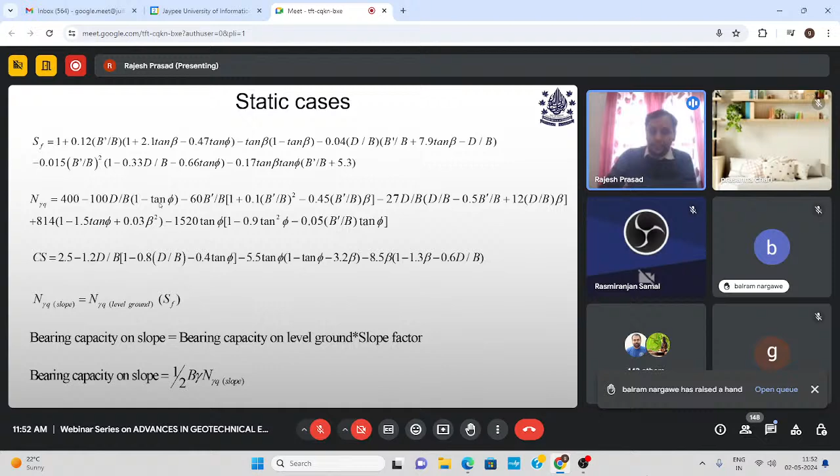If you know the slope inclination, the setback distance ratio, and the phi value of the soil, you can use those parameters to get the bearing capacity directly from these numerical study equations. Similarly, for the seismic case, equations have been developed to determine the critical setback distance, the seismic bearing capacity, and the slope factor.

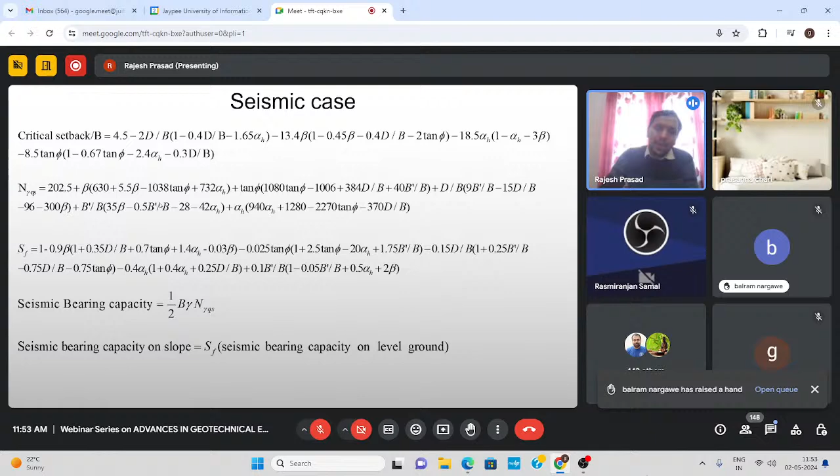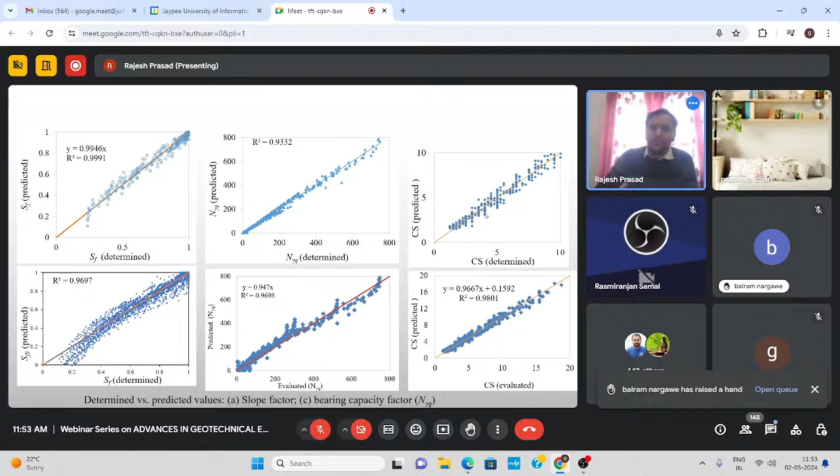So this is the validation you can see: this is the predicted one, this is the determined one. We can see these equations predict all the parameters almost very accurately. This is the validation of our equation. We developed these equations based on numerical studies, and they have been validated with experimental studies performed by Keskin and Laman.

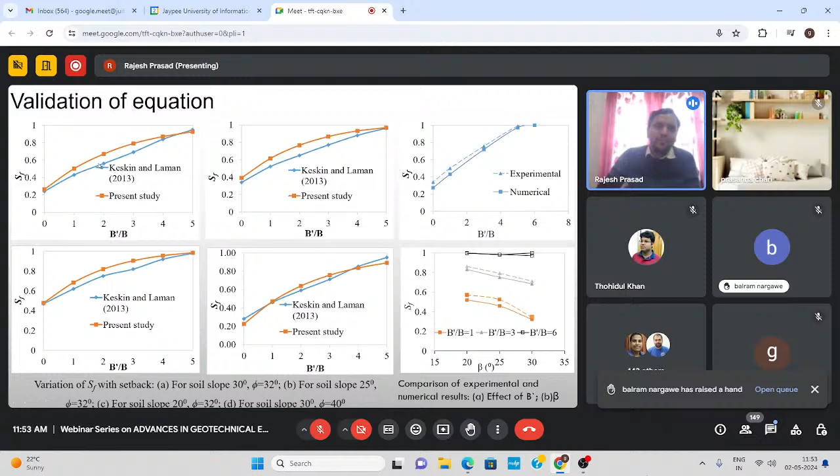We can see that in the present numerical modeling case, we have a slightly higher slope factor, meaning the effect of slope is less. Similarly, we compared the results with many studies' equation results, not the study results directly. Our equations predict the bearing capacity factor on slopes very accurately. When phi is small, it is almost average; when phi is increasing, in our case we get a lower value of bearing capacity compared to earlier studies.

Thank you, Dr. Rajesh.

Thank you, sir. Thank you, sir.

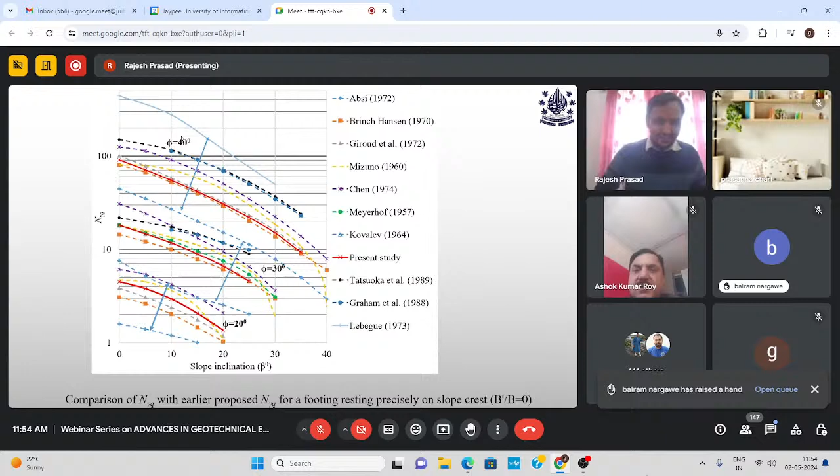That was a very good aggregation of all the concepts. If someone has to construct something on slopes, you very well explained the constitutive modeling, and also the various factors that contribute to the failure of the foundation, and the effect of depth and all. Thank you very much, that was a very informative lecture. With your kind permission, can we go to the question and answer session, please?